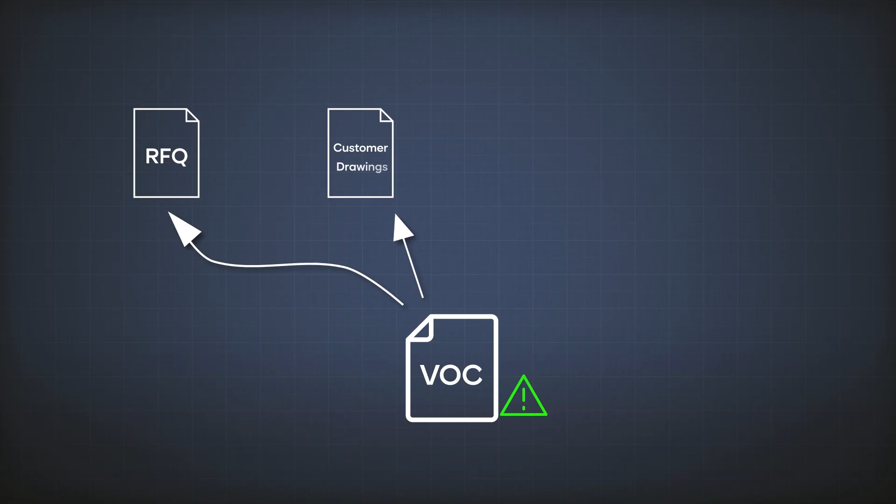In Automotive APQP, VOC is not a single document. It is the sum of all expressed and implied expectations coming from multiple sources, many of which are incomplete, inconsistent, or even contradictory. Your job in APQP is not to receive VOC. Your job is to extract, interpret, and close the gaps.

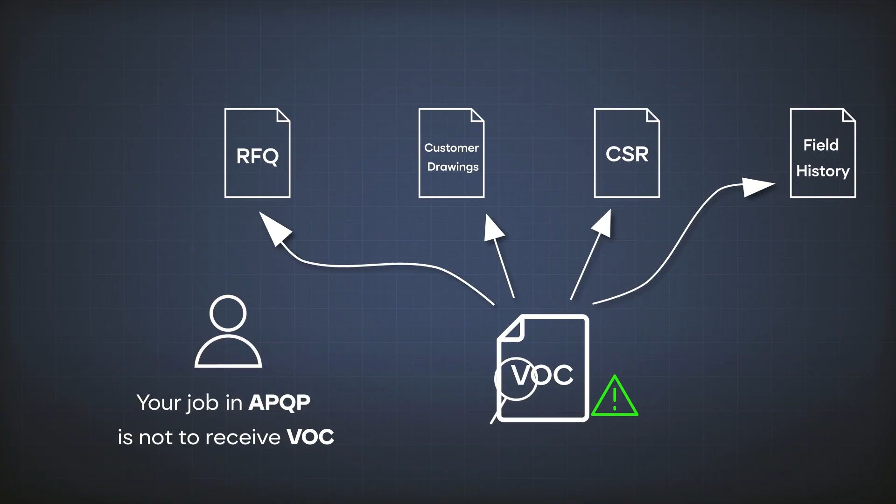In reality, VOC is scattered. You'll hear it in the RFQ technical package, where the customer might mention IP protection, lifetime, or environmental exposure, but usually without defining test methods or acceptance criteria. That vagueness is your first hidden risk.

Then you move to customer drawings. These give you envelope dimensions and interface geometry, but very often they stop short of specifying tolerances, surface roughness, or flatness requirements. Those missing details will come back later as quality problems.

Next are customer-specific requirements, or CSRs. These often dictate how DFMEA must be structured, or how deep PPAP submission should go. The danger here is that CSRs are not always synchronized with your APQP timing.

Some of the most valuable VOC comes from field failure history, past leaks, corrosion issues, or EMC complaints. Unfortunately, this information is rarely shared formally unless you ask for it.

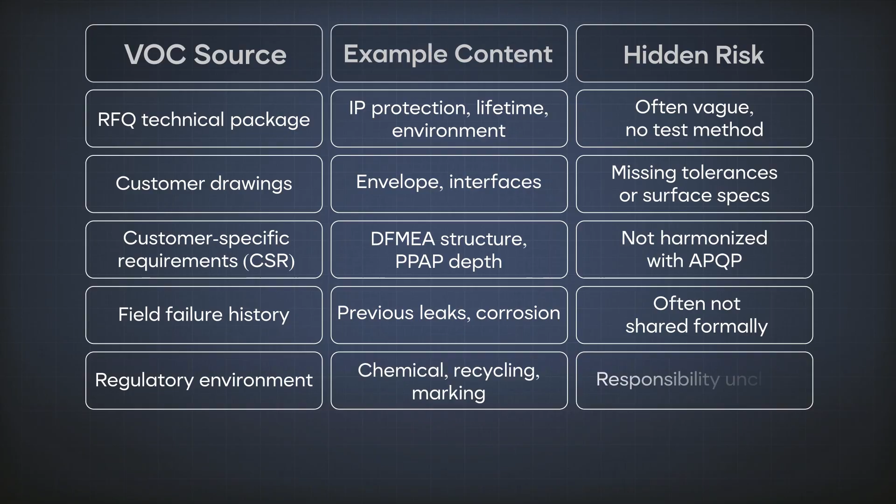You also have VOC coming from the regulatory environment, chemical restrictions, recycling rules, or marking requirements. The problem is that ownership for these requirements is often unclear. Is it design, quality, or compliance?

Manufacturing also contributes VOC through the production concept, volume, ramp-up plans, takt time, and capacity assumptions. These are frequently misaligned with the depth of validation testing.

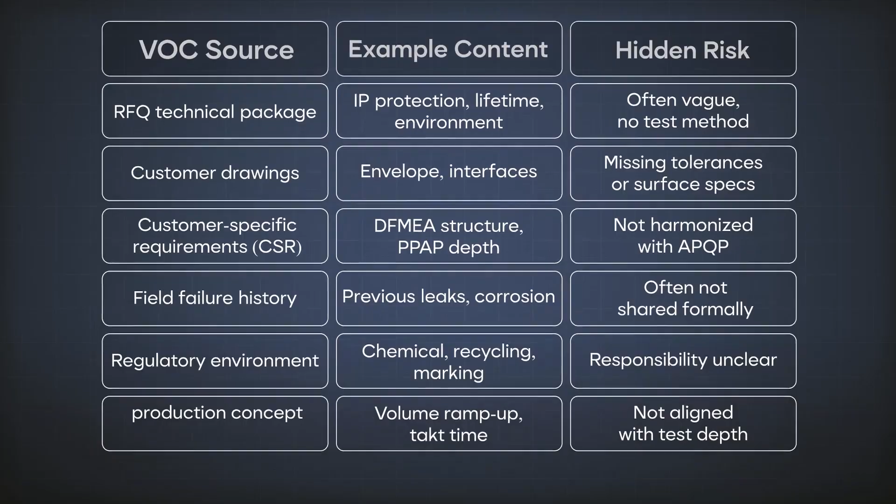Finally, there are warranty and PPM targets. Customers often set aggressive numbers without aligning them to design robustness or process capability. VOC is not missing. It's fragmented.

This fragmentation is not accidental. It's structural. Customers focus on vehicle-level optimization. Suppliers carry the burden of component-level reliability.

So when a customer asks for IP67, they're not thinking about leak rate physics. You are. When they say engine bay capable, they don't define thermal shock profiles. You must. When they demand EMC stability, they don't design grounding continuity through coatings. That's on you. If you accept VOC as complete, you accept responsibility for every undefined assumption.

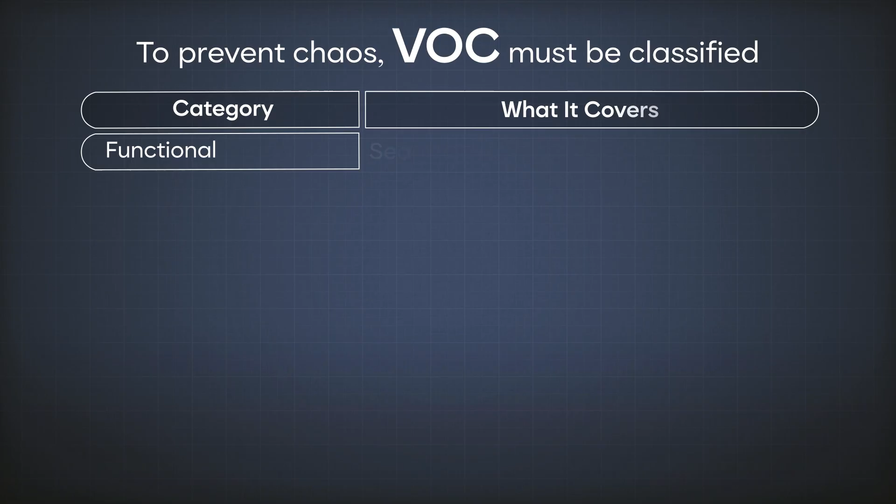And those assumptions eventually turn into failures. To prevent chaos, VOC must be classified. Some VOC is functional, sealing performance, grounding paths, connector retention.

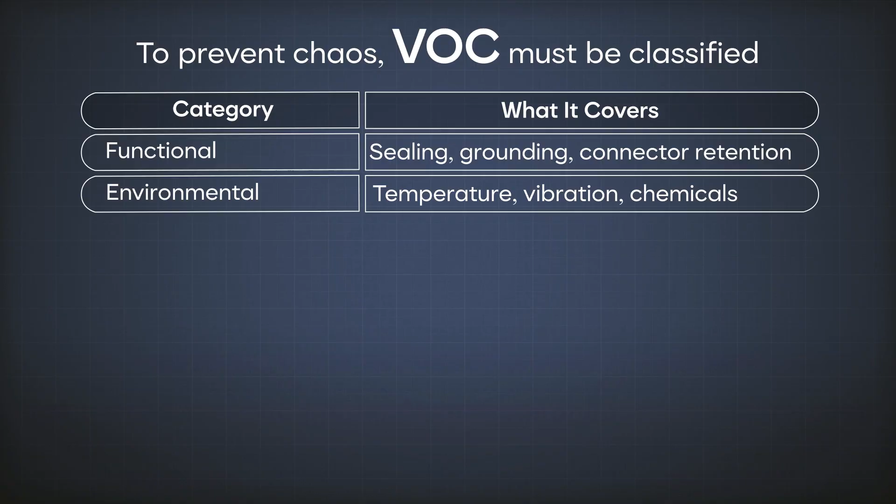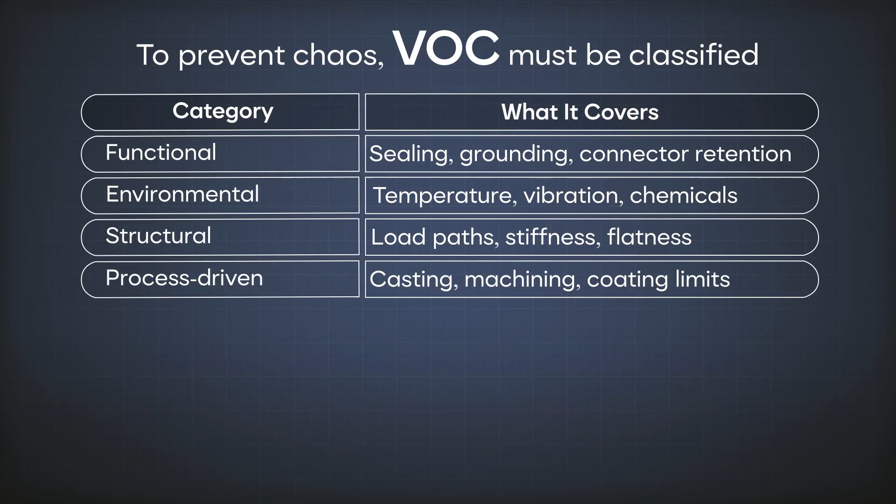Some is environmental, temperature ranges, vibration loads, chemical exposure. Other VOC is structural, dealing with stiffness, load paths, or flatness requirements. You'll also see process-driven VOC, which comes from casting limitations, machining tolerances, or coating processes. Then there's quality and reliability VOC, lifetime expectations, warranty limits, and allowable PPM.

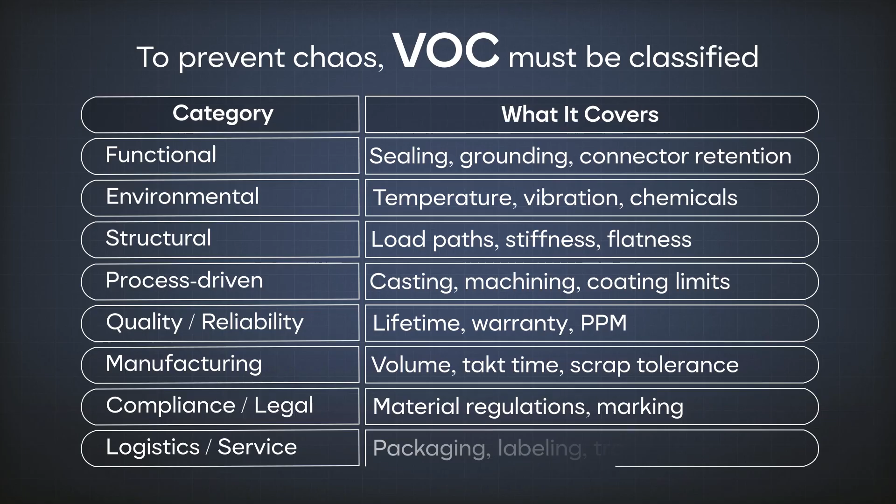Manufacturing contributes VOC related to volume, takt time, and scrap tolerance. Compliance covers legal, environmental, and material regulations. And finally, logistics and service introduce requirements for packaging, labeling, and traceability. If you don't classify VOC, you'll either over-design the wrong things or under-design the critical ones.

Let's look at typical VOC language. When a customer says, 'the housing must be sealed,' that statement is meaningless from an engineering perspective. There's no IP class, no aging condition, no pressure, no test method.

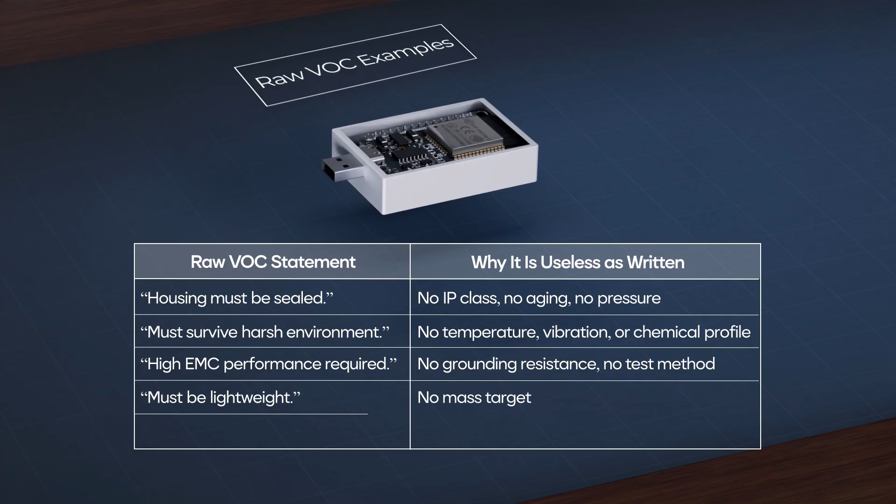Must survive harsh environment sounds serious, but without temperature, vibration, or chemical profiles, it's just marketing language. High EMC performance required gives you no grounding resistance, no test setup, no frequency range. Must be lightweight, has no mass target. Durability must match vehicle life, has no failure definition.

Raw VOC is a starting point, not an input. This is why the VOC capture log exists. This document is not optional. It is your legal and technical firewall.

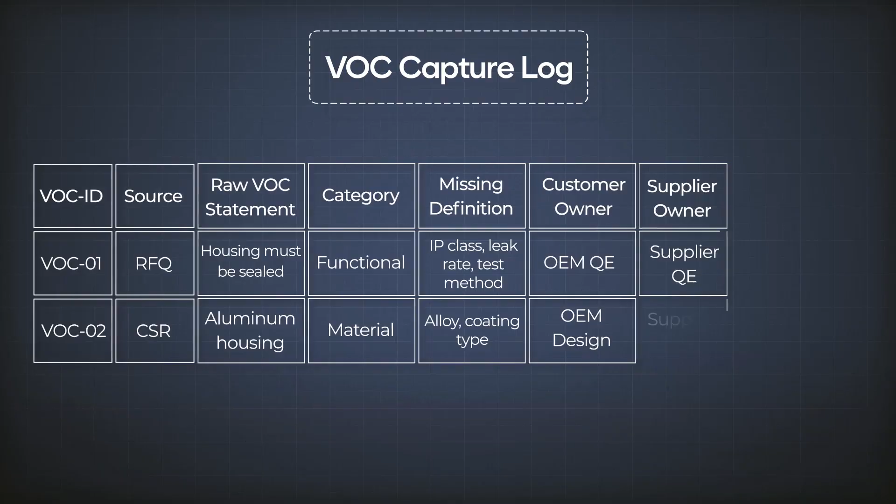Every VOC statement must be logged, categorized, and challenged. For each VOC, you document where it came from, how it was stated, and what is missing. You assign a customer owner to clarify expectations and a supplier owner to translate them into engineering terms. You define a due date and track status.

If a requirement is not in the VOC log, it is invisible. If it is invisible, it will not be managed. VOC is qualitative. Engineering is quantitative.

Every requirement must be testable. Every requirement must have a clear acceptance criterion. Every requirement must have a responsible owner.

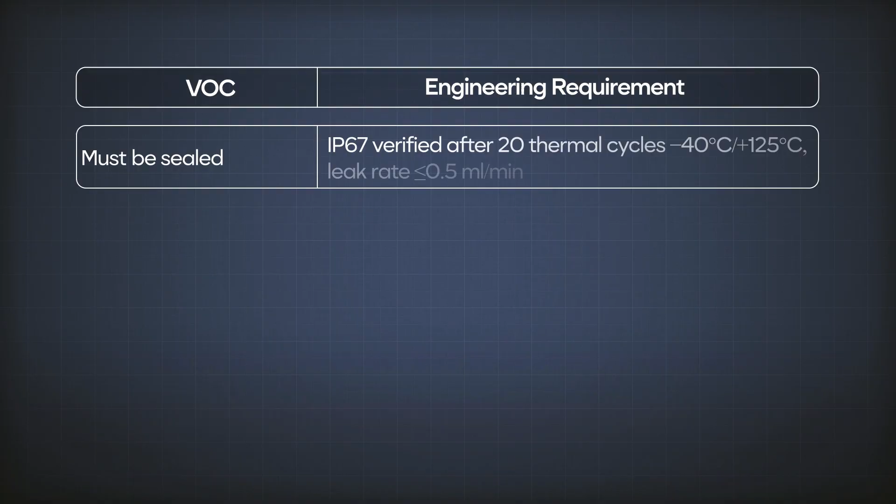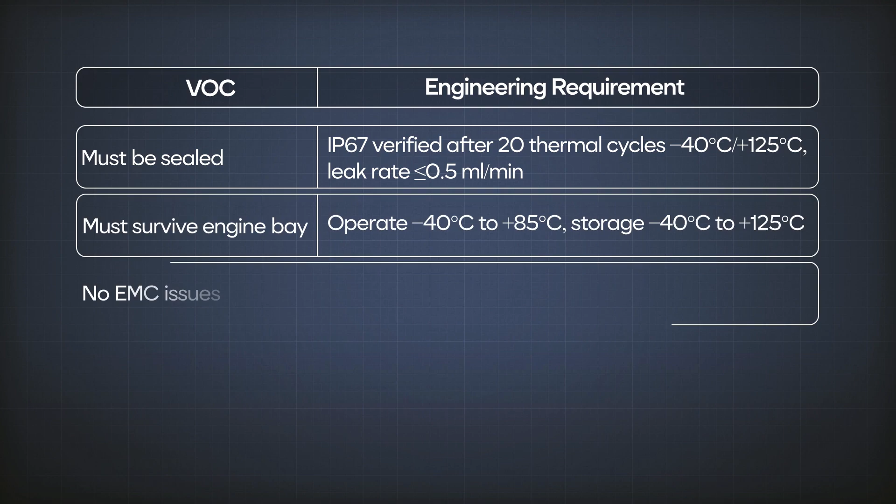So, must be sealed becomes a defined IP class, verified after thermal cycling with a maximum leak rate. Must survive engine bay becomes operating and storage temperature limits. No EMC issues becomes a measurable grounding resistance after corrosion aging. If you cannot verify it, it is not a requirement.

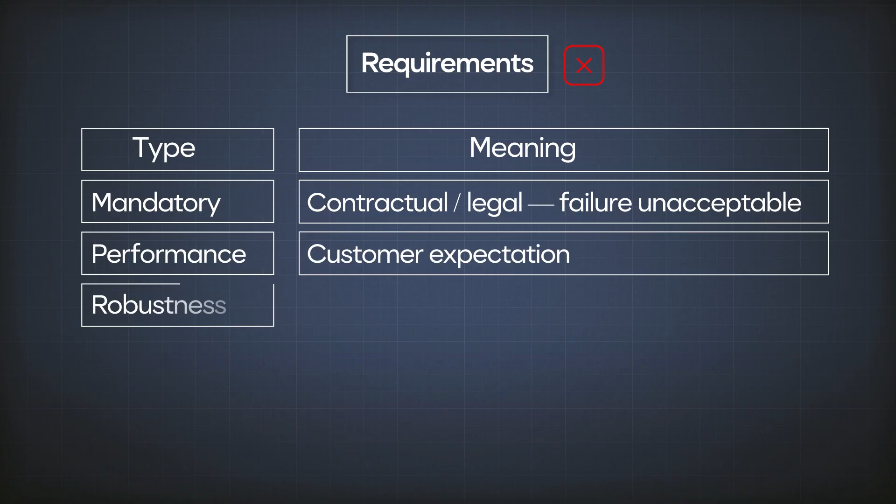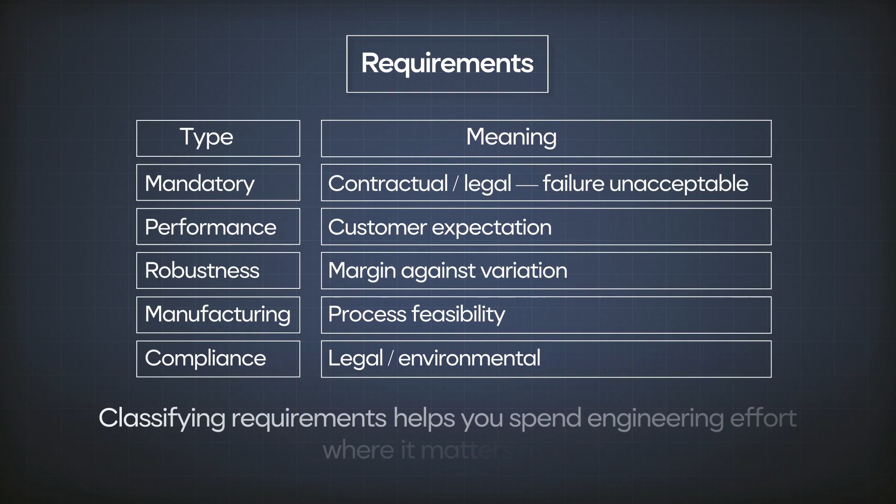Another common mistake is treating all requirements the same. Some requirements are mandatory, legal or contractual, and failure is unacceptable. Others define performance, meaning they reflect customer expectations. Some exist for robustness, providing margin against variation. Others protect manufacturing feasibility, and some ensure regulatory compliance. Classifying requirements helps you spend engineering effort where it matters most.

This is where most APQP projects fail. They stop at the first line. Take the simple requirement. The housing must be sealed. That single sentence actually hides multiple technical conditions.

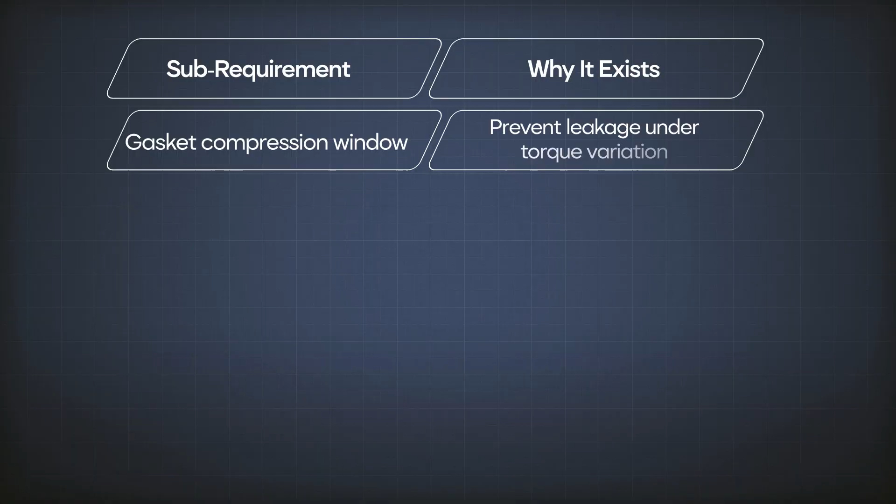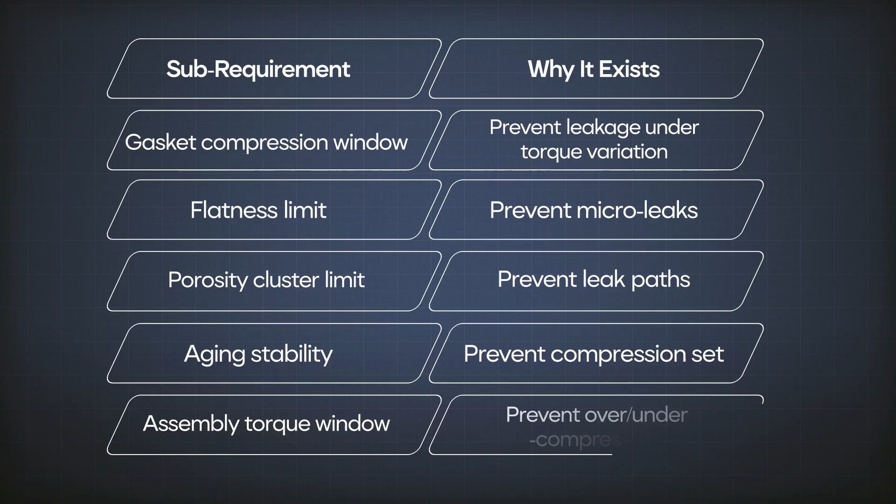You need a defined gasket compression window to absorb torque variation. You need flatness limits to prevent microleaks. You need porosity controls to avoid leak paths. You need aging stability to prevent compression set. And you need a defined assembly torque window to avoid over or under compression. Most APQP failures happen because teams stop at the first sentence and never decompose it.

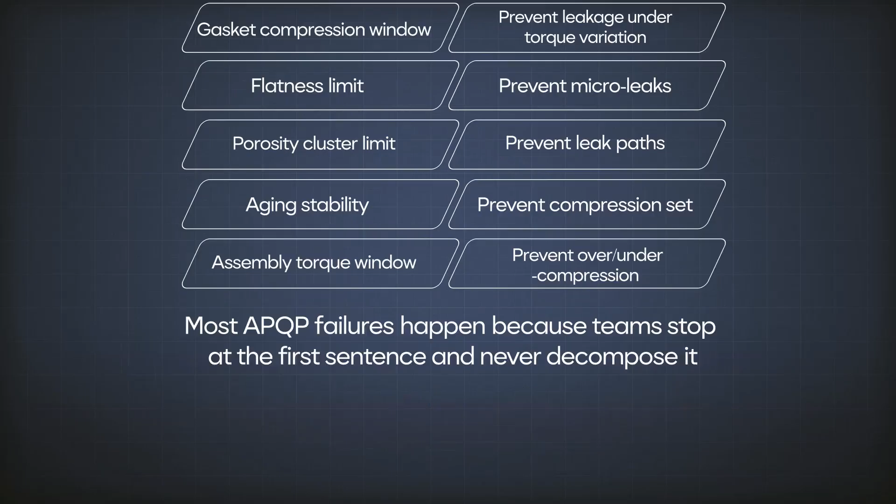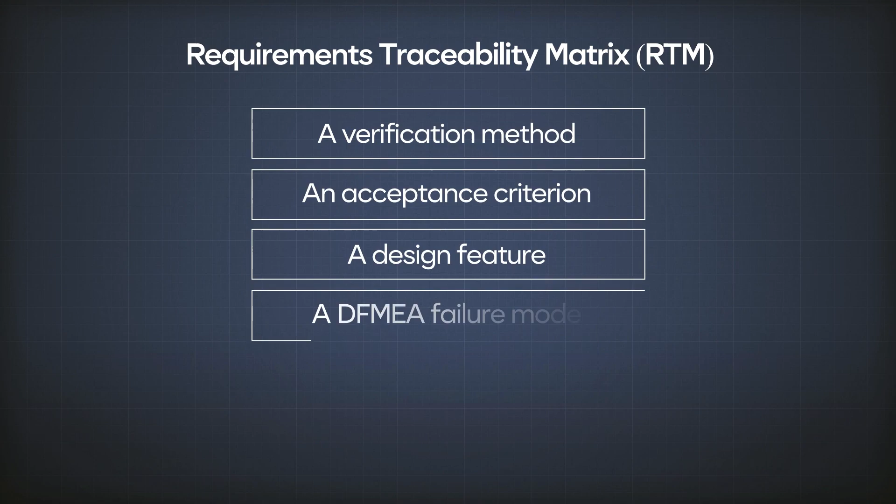Finally, everything must be traceable. That's why we need the RTM, the Requirements Traceability Matrix. Every requirement must link to a verification method, an acceptance criterion, a design feature, a DFMEA failure mode, objective test evidence, and a responsible owner. This traceability ensures nothing is assumed, nothing is forgotten, and nothing is debated at SOP.

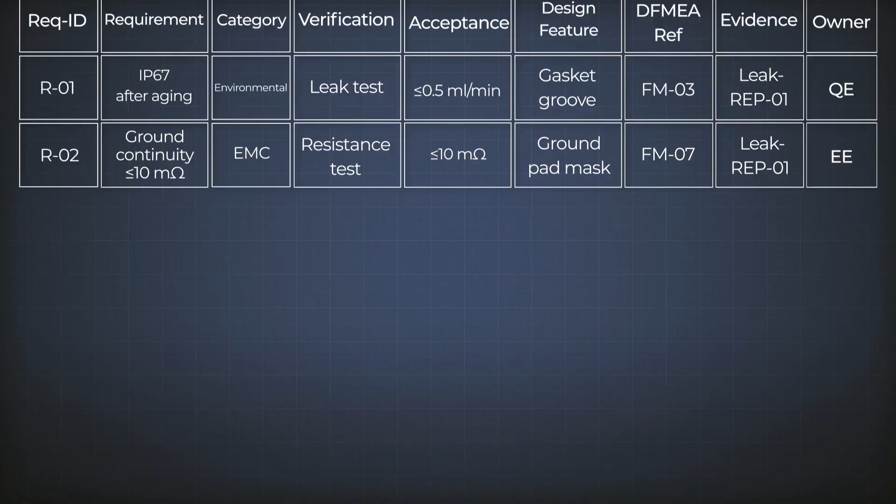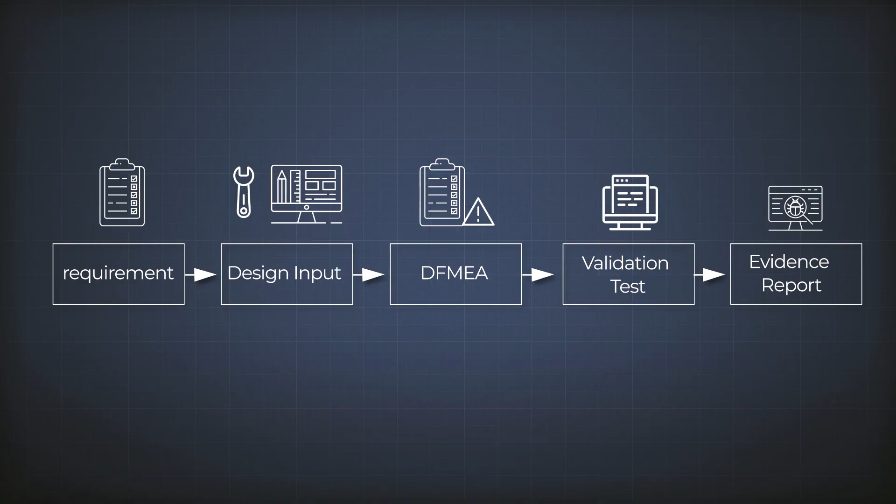Let me leave you with this thought. If you cannot trace a requirement from the customer's voice to a design feature, to a failure mode, to a test, and finally to objective evidence, then your APQP may look good on paper, but it is not real, and reality always shows up after SOP.